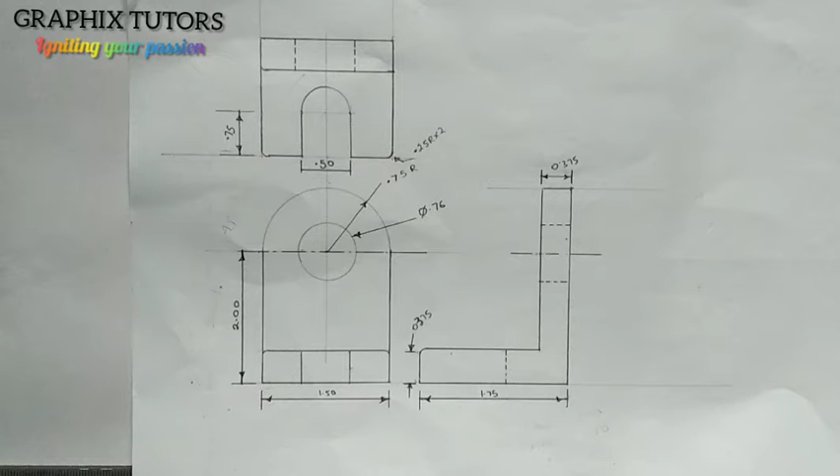Today we want to study another aspect of engineering drawing where we are going to be assembling a component which is already exploded in form of an orthographic projection, and this is the component here. It's already an orthographic projection, so we want to draw them in isometric. Now, if you look at this very well, let me zoom to you.

Everything is in centimeter, right? So you have to convert them into millimeter. We know that if you are moving from meter to millimeter, you'll be multiplying your value by 1000, right? And if you are moving from centimeter to millimeter, multiply your value by what? By 100. So what we simply do here is multiply everything here by 100. Let's start and see how it goes.

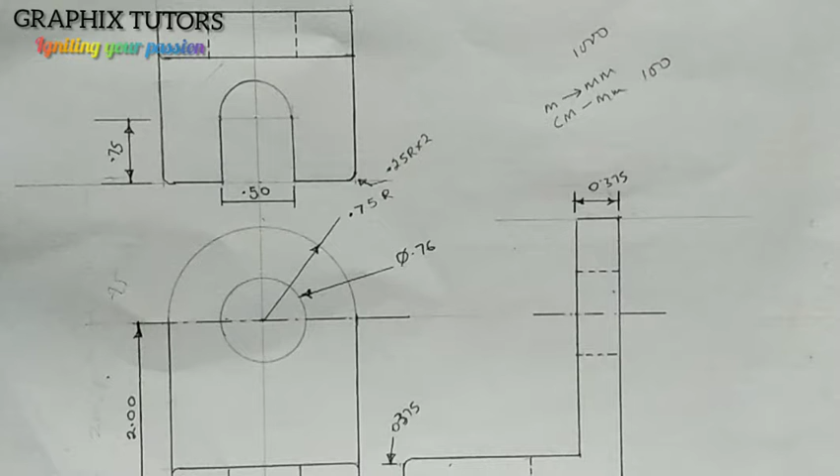0.375 times 100 will give us 37.5. So the main dimension here is 37.5 millimeter. Is that taken? Now the same thing here, from here to here is 1.75 multiplied by 100, we're having 175. The same thing here, multiplied by 100, we'll be having 150. Right here, multiplied by 100, we'll be having 200.

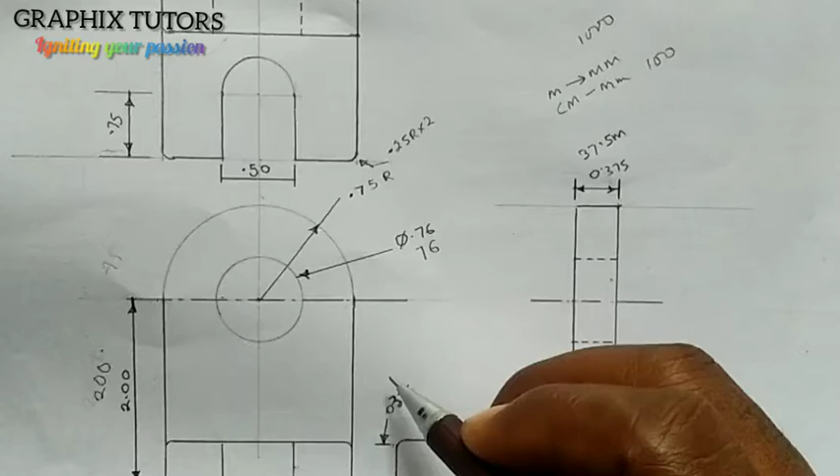Here, multiplied by 100, you'll be having 76. Here, 0.75 multiplied by 100, you'll be having 75. Then if you multiply here also, you'll be having 75. Right now, what else again? This also gives me 37.5. This will give me 25.

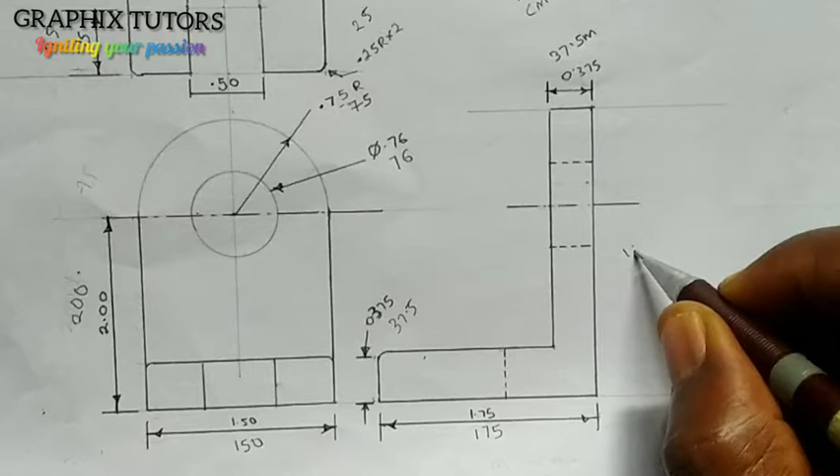If you notice this now, these are very big. So I'm going to be using a scale of 1:2, half of my dimensions. So if I divide 175 by 2, I'll be having 87.5. So 87.5 is what I'm going to use. I'm doing my scale with 1:2. So the next one, 150 will give me 75. 200 will give me 100. 76 will give me 38. The one I circled is what I'll be using.

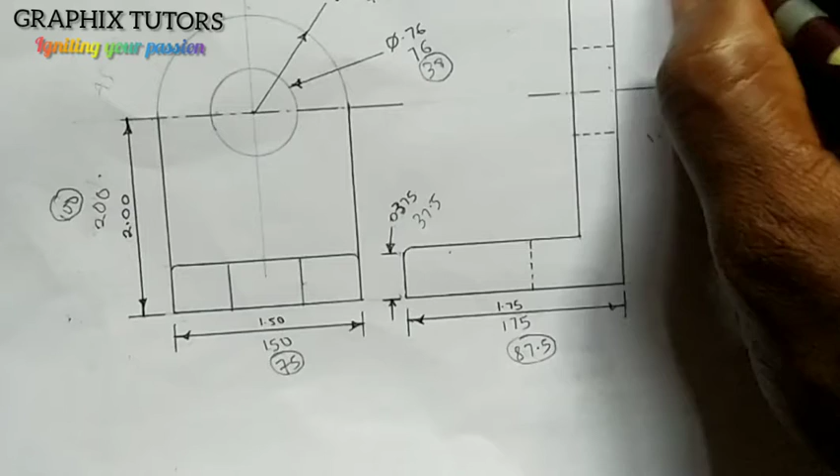Then 37.5 will give me 18.75. That's what I'm going to use. Then 75 will give me 37.5. 25 will give me 12.5. Then 75 will also give me 37.5. Let's do this one here, 37.5.

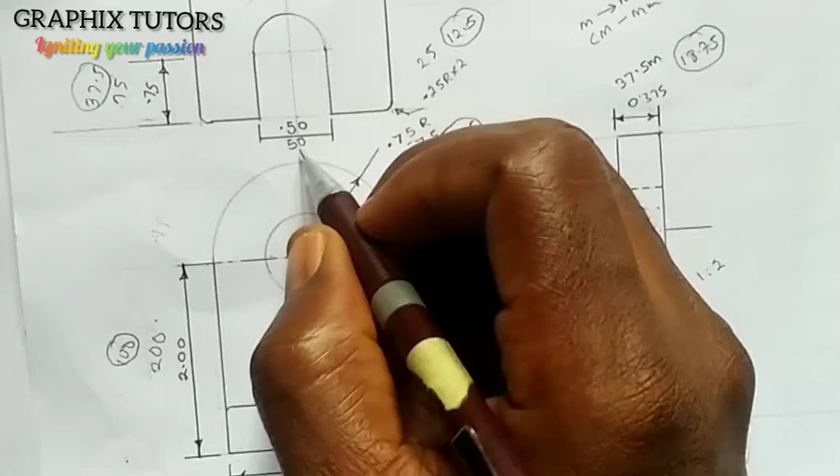Then 0.50 times 100 will give me 50. If I divide it by 2, I'm taking half of the dimension to give me 25. Is that taken? So those ones I circled are what I am going to use. If I divide this, I'm still going to have 18.75. So these are what I am going to be using. So let's start and see how it goes.

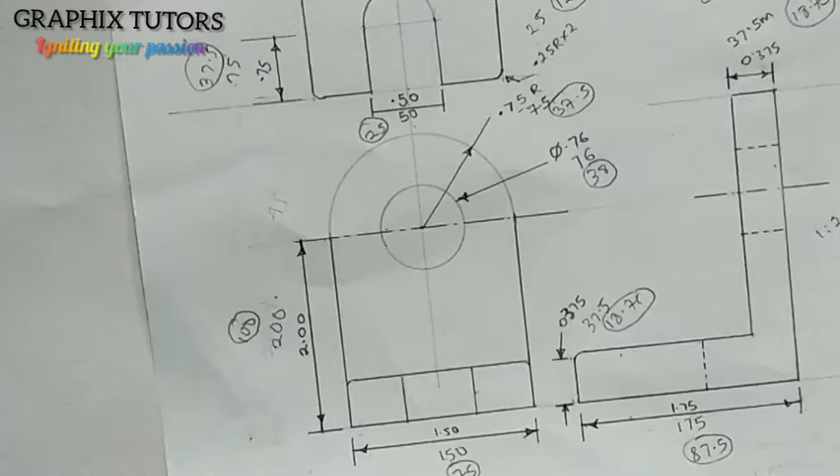First of all, since we are drawing in isometric, we need to draw our 3 axes. So first of all, I'm going to draw the vertical. You can see that. And I'm going to draw the horizontal, which is this. Then also here, an angle of 30 degrees to the horizontal.

Now in doing this, I'm having my length, the width, and the height. Looking at my diagram here, this is in third angle projection because my plan is on top of my front elevation. This is the end elevation here, right? So I'll first of all start by drawing this. How would I start? I'll look for the entire height, the entire length, and the entire width.

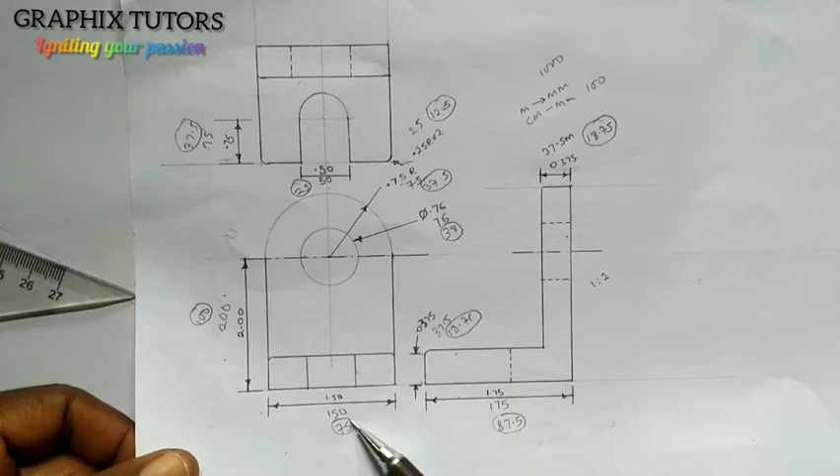This is the width here. I'm using the one I circled, that is 75. So I'm going to measure 75. 75 will be from here to here. Can you see that? So this is 75, starting from here to this point. Right? Now the next thing I'll do is the other aspect again.

The length is 87.5. So I'm going to measure my 87.5. So this is 87.5. Let's see how it goes. So this is 87.5, somewhere around there. So we're going back.

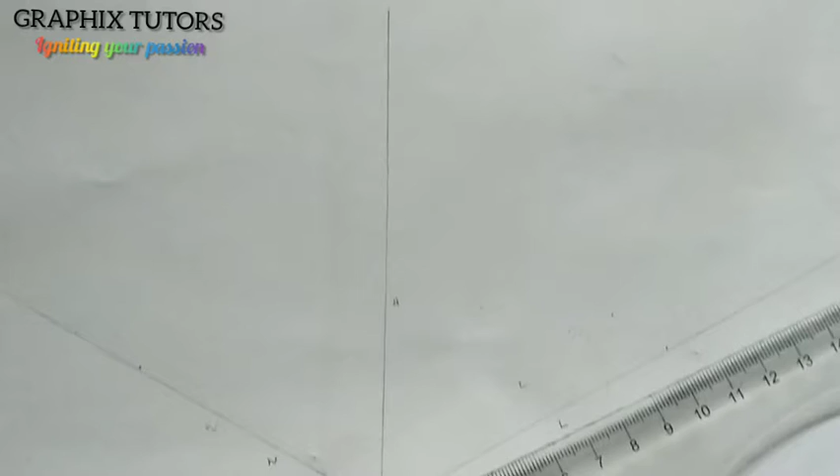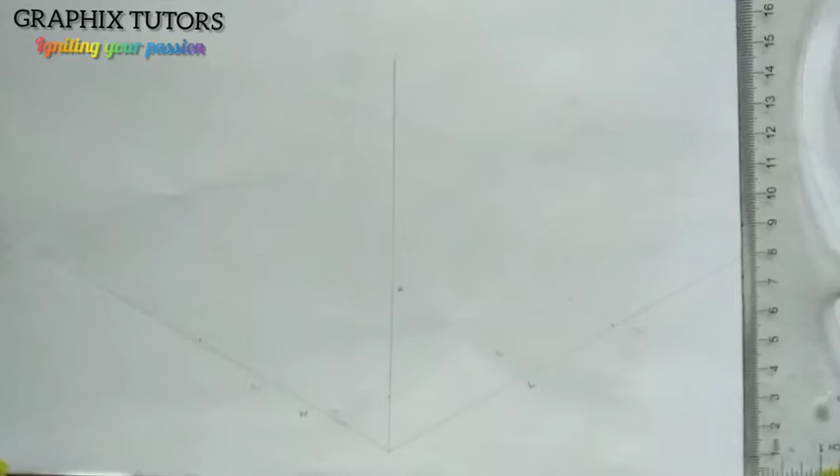Now after that, the height here is given to be, first of all, let's move with 18.75 first. Right, let's start with that. This thickness here, 18.75, which is this. So I'll start with that. So I'll go with 18.75. So from 1, this is 10, 15, this is 18.75 here, somewhere around here. So I'm going to close it up. Just start with that first.

I'll close it up, placing it on my T-square. Take this up, first start. Then come here, take this up also, first start. Then I'm going to close this up. And I'm going to close this up too. Right? And I'm going to close here up too. And close it up too.

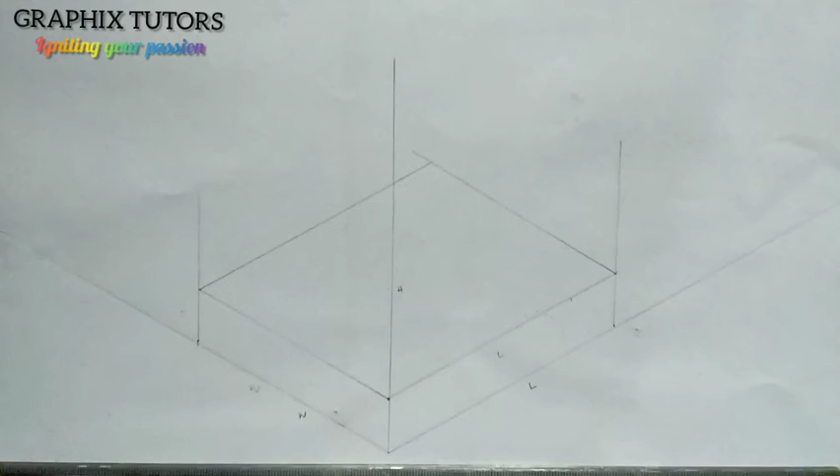Now, after doing this, I want to draw. I've gotten this plane here, as in this thickness here. So I want to start drawing. Now what do you discover? You discover that this is the front and this is the side. So I can easily just stick in here since I know where exactly I'm going to. I'll take my metal rule and I'll take in from here to this point here. From here to this point. Can you see that? That's the first thing I'll do.

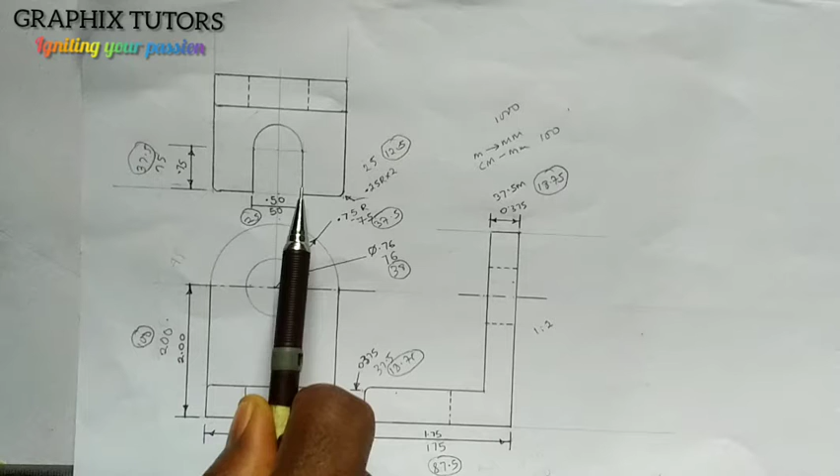And the next thing I'm going to do is, if you look at this, this is the plan, right? So it's telling me that from the center of this, from here to here, we have what? 50, right? So I'm using 25. This is 50, it's too big. So from this point to this point here is 25. That means from here to here also is 25. So I'll get the center, because this is the front. I'll get the center of this line here, and I'll measure 25 in between.

So there are two ways we can do that. If you know from here to here, we know it's 75. So to get half of it, we'll use 37.5. So I'll take my meter rule and I'll measure 37.5. Right? So what you can simply do here, instead of that, you can easily measure your 75 here. This is from 1 straight down to this is 75. That's my AB, right? We know it is 75.

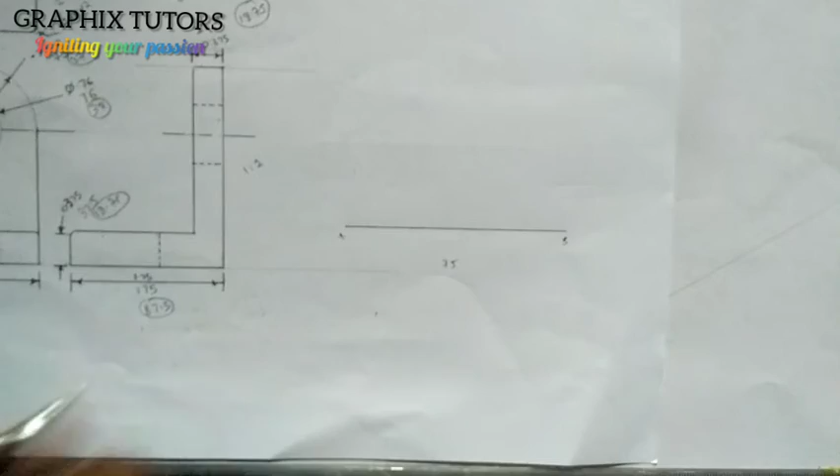So if I bisect it this way, from here to here, I will bisect up, and I'll bisect down. I'll place it here also. I'll bisect up, and I'll also bisect down. So they'll be passing through the center point from here to here. Right? So from here is 37.5. From here is 37.5. So instead of using my meter rule, I can easily take my compass here and place it from here to here to get my 37.5. So I'll place it here and I'll cut. So that's my 37.5.

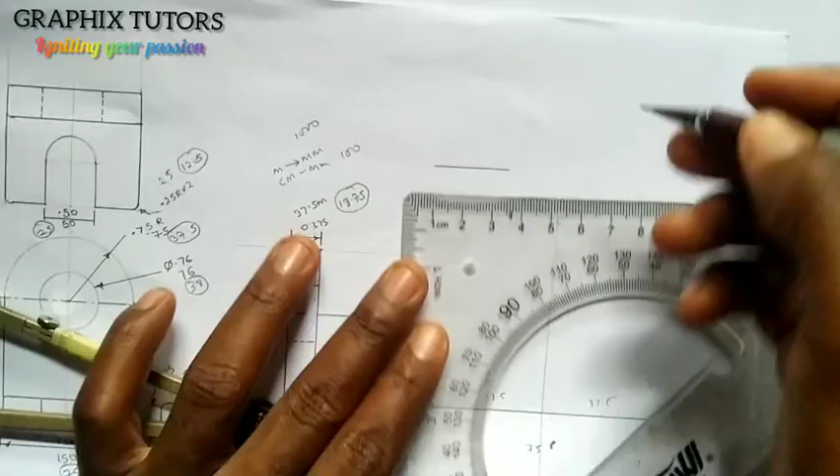Now the next thing I'll do is 25. We say from here to here is 25, right? So I'm going to use 12.5. So let me measure 12.5 on my meter rule. Again, to save ourselves from stress, you do the same thing, you measure 25. 25 is from 1 here straight down to this, right? Then I'm going to bisect it. I'll cut here, then place it here, right? So where they are placed, from this point to this point, this is my 12.5.

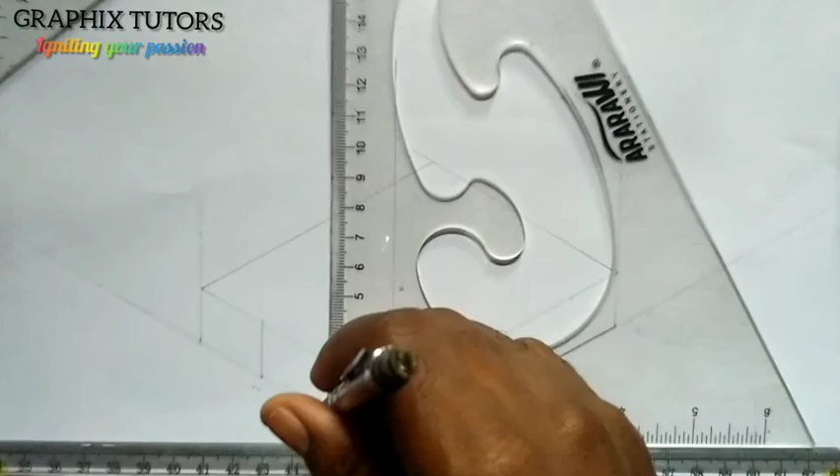So I'll take my meter rule, place it here to this point, and I'll measure 12.5 to the left and 12.5 to the right. You can see that, and I should be able to take them up to this point. Then take them up to this point. Can you see that? Now if you look at this here, this is 12.5, right? Now it moved from somewhere to some extent here. That means I need to move it inside.

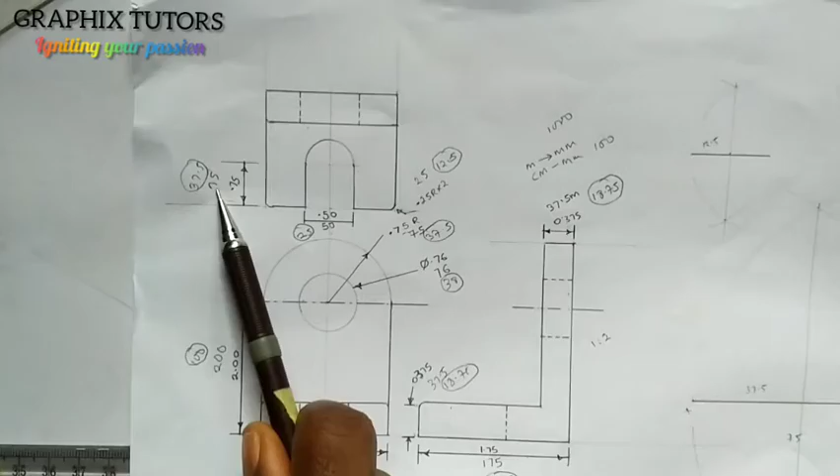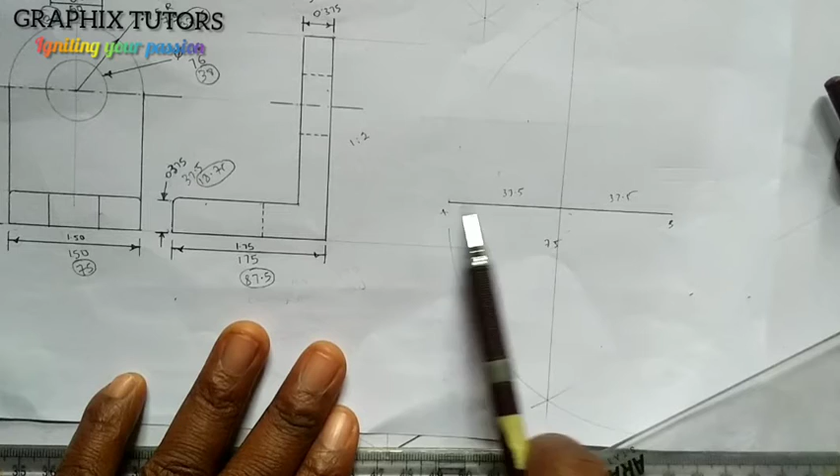But the question is, what is the distance? The distance is telling me that from here inward, I'm having 25, right? And from here to here 25. So it means that from here to a certain distance is 75. So what am I going to be using here? I'm using 37.5, because I said earlier that's the one I circled. So if this is 37.5, if I bisect it again, this point to this point, that's 37.5. So what I will do is I'm going to take this in.

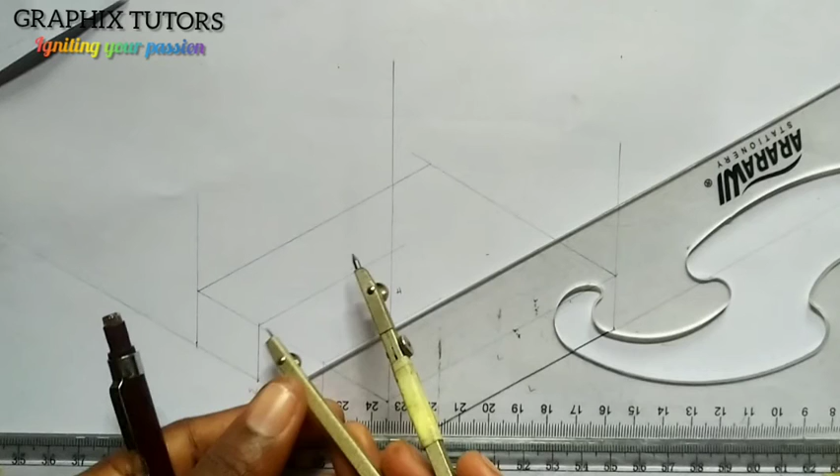I will take this in and also take this in, right? And I'll measure my 37.5 there, which is what I measured from here to here, and I'll place it here. I'm going to mark. So where they meet, I'm going to take my set square and just use my faint line to join them at that point. Join them at that point.

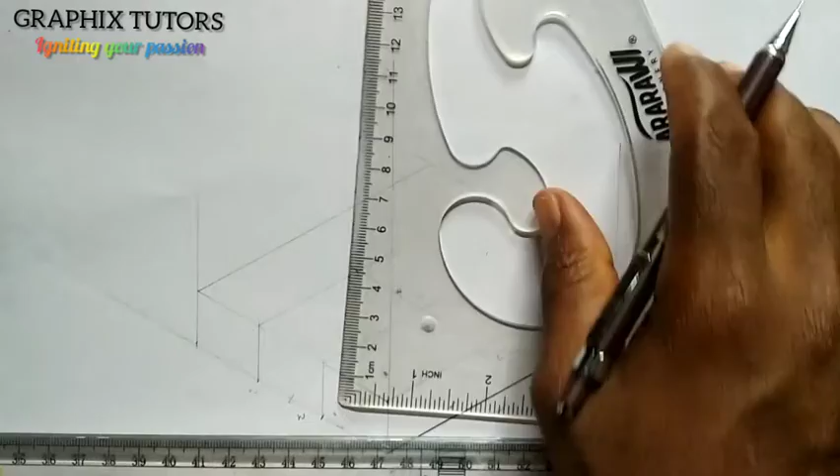You can see that. Now also I can just take this up also, this my center point here. I'll just raise it up and put it up. So they are all meeting at this point, right? Now I know very well that this is also going in because the thickness is going in, so I'll just stop there first. So it is somewhere around here. It is somewhere around here.

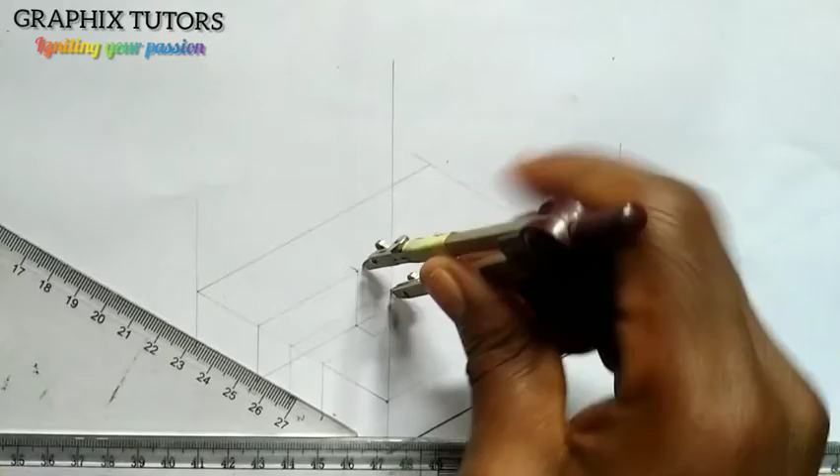You see that I'm using faint line? It's somewhere around here. So I want to draw, there's a curve. If you look at the plan, there's actually a curve here. So I'm going to draw my isometric circle there. So if you look at it, we know that the distance from here to here is 37.5. So what I'm going to simply do is I'll just take my compass. I'll place it at the center point here and I'll take this measurement here. I see the measurement from here to here, and I'm going to just come and cut it here, cut it up here, and cut it down here.

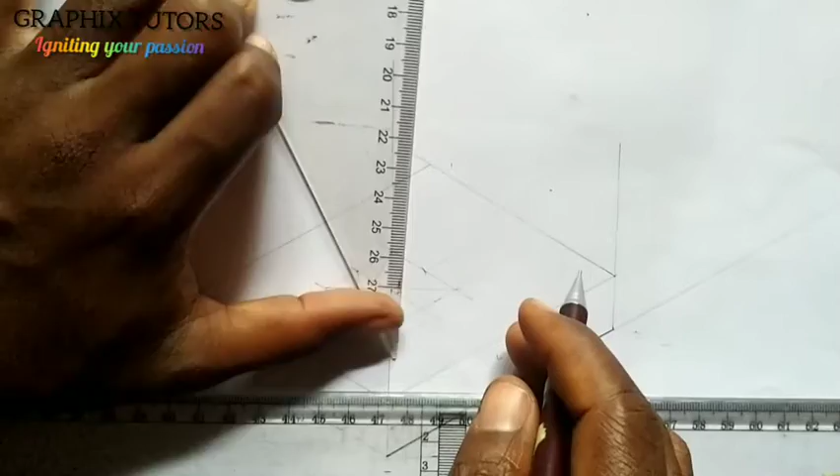Is that taken? So I'll complete it to give me a box, like a box. So this will give me a box from this point and this point also. Now I've gotten this box here you see. Is that taken? So what I'll simply do is complete it to draw my isometric circle. Right, and then I know that from here to this part, and from here to this part. You can see that. So let me zoom it.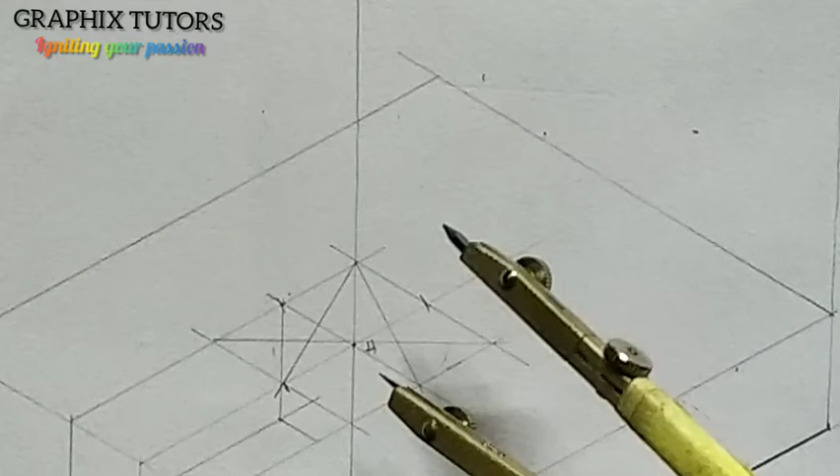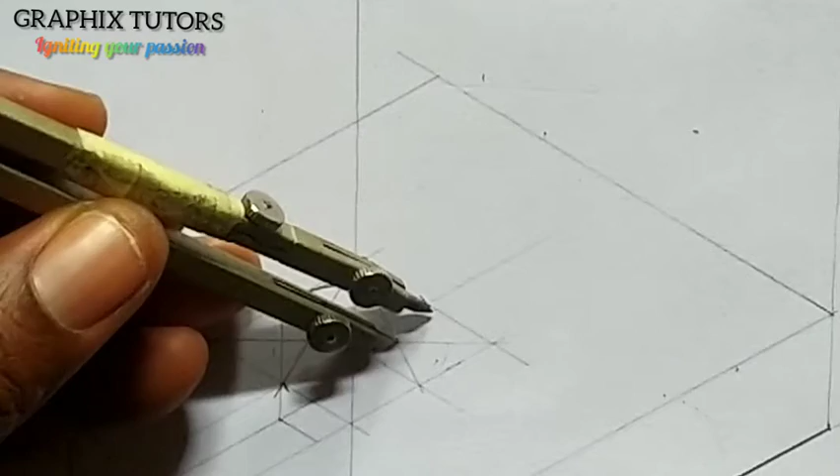Now, after doing my isometric this, from this point here, I'll place it and I'm going to draw an arc, right? There's an arc. You can see that. And now I'm going to come at this point here, place it here, and I'll come to this point, and I'll zoom it out. Right? Sorry. I'm going to do the same thing. When doing that, take it back.

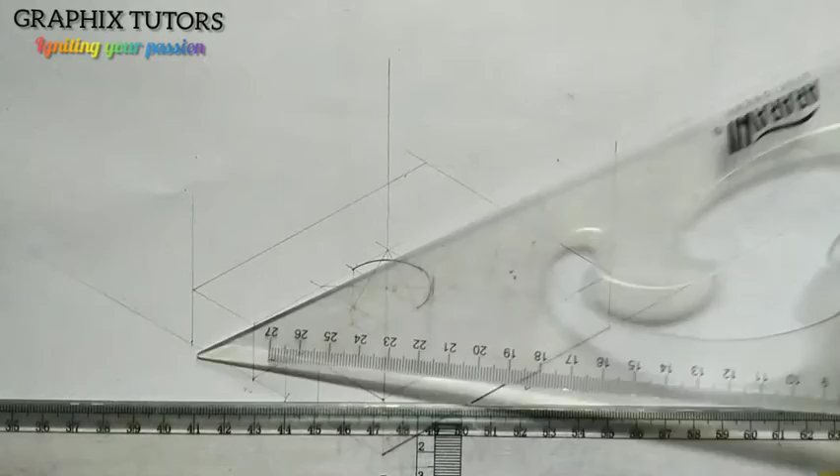Now, what we're going to do here is that I'm going to pull it straight down. Right, this curve I draw here is this curve. So I'll pull it straight down to touch the end in here. So let's do that. From here. Here also. Right. Now, also at this point too.

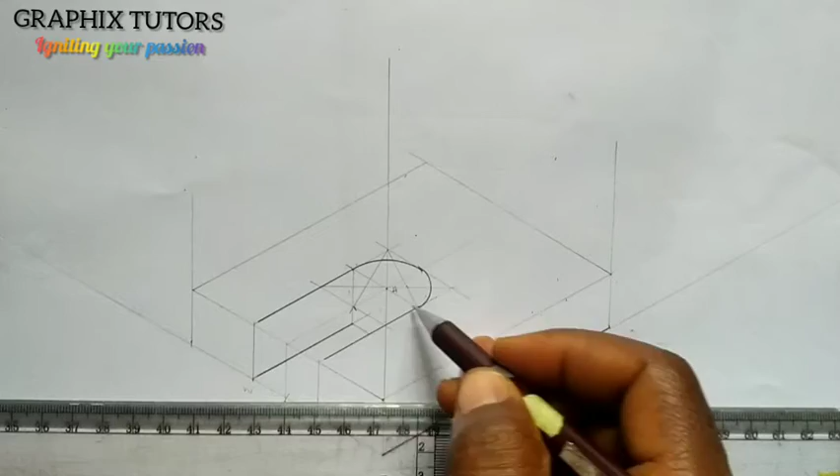Now, what I'll help myself is just using to draw this guy too. So what I'll do here is I can bring this down. And bring this one down too. Bring this down too. I'm repeating the same thing here. Faint line.

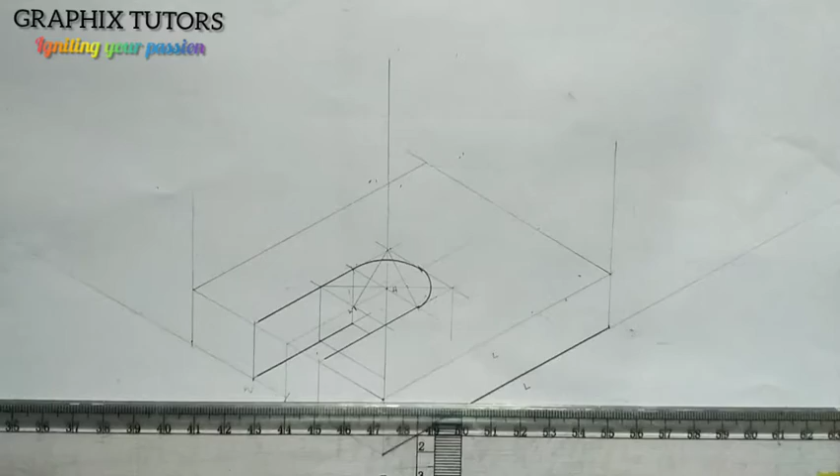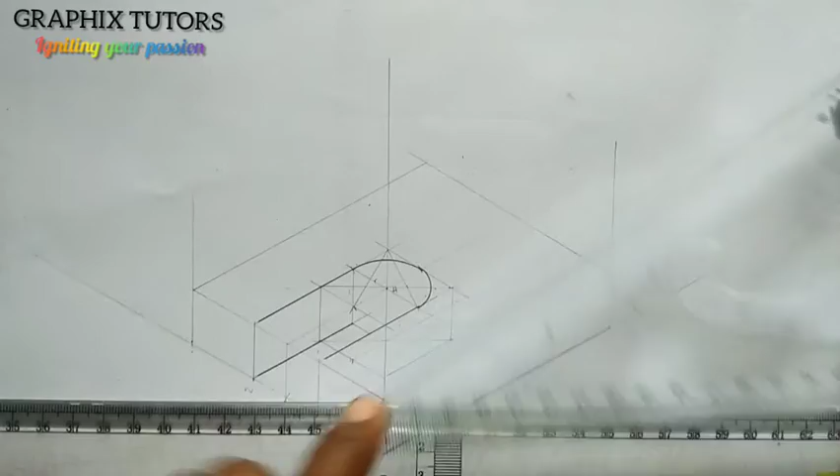Right. So we know we are joining from here to this point, right? And to save ourselves from stress, I have this way. The center of that guy. And here too. What I'm actually doing is trying to replicate what I did up here. So if you look at what I did here, at this point here, I'll place, let's zoom it up and see.

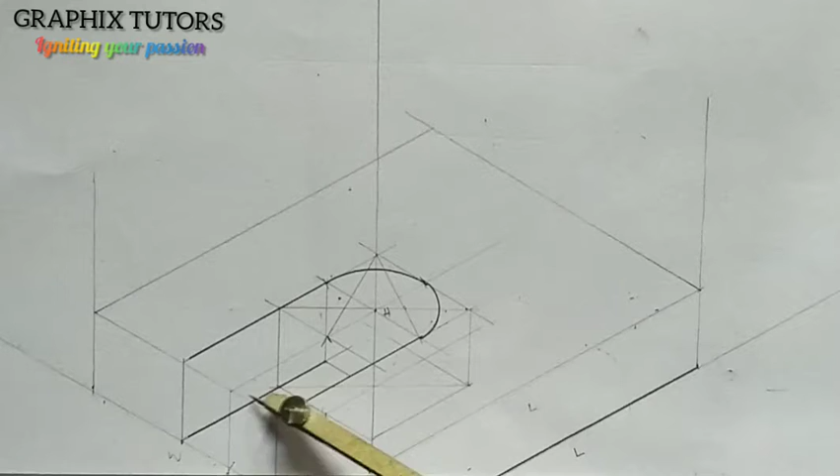At this point here, where this line and this line meets, I'll place my compass here, and I'll take this curve here. I trace it down here. So I'll place my compass at this point, and I'll draw until it touches here, just like this. You see that? That's what I want to just do. Take it back. Now if you look at this, I will complete this drawing here.

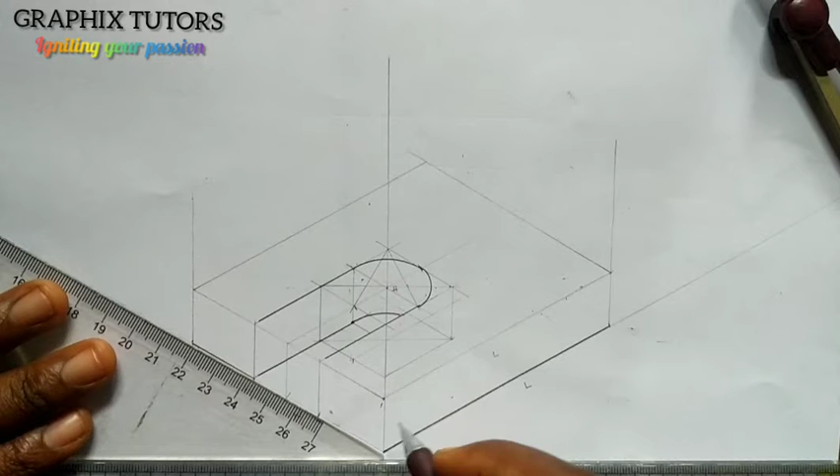From this point to this point, then from here also, from here to here, right? Then from here to here, from here to here too, and then so this is what we're going to do.

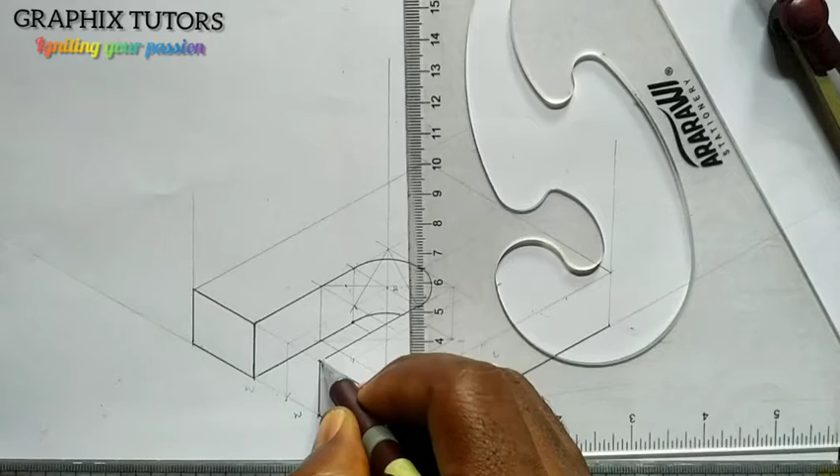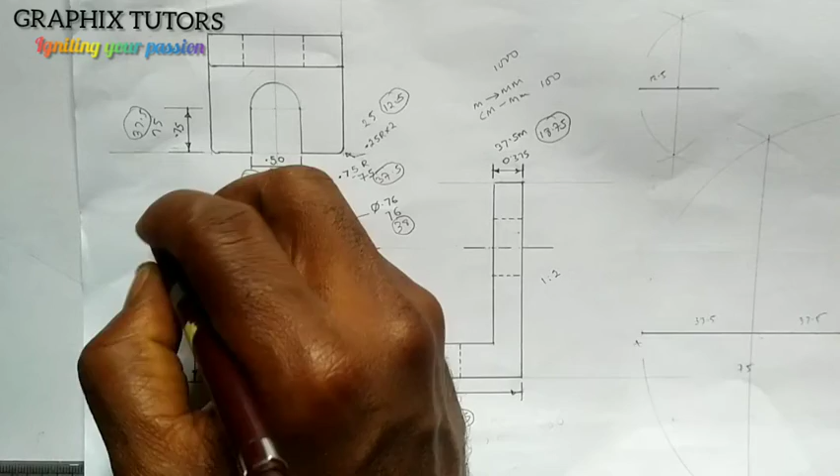Now we've done this, right? So the next thing we'll do is, if you look, we successfully interpreted this guy here, which is this. So the next thing we need to do is to draw this upward. So I'm going to measure from here to this point is 200, which is from here to here, or 100, and from here to here is 75. From here to here is 200, and from here to here is what? 75. So what I'll be using will be what? 37.5. Right? Because if you look at the radius, 0.75, which is 75, and half of that is 37.5, that's what we have here. So I'm going to measure 137.5 up here.

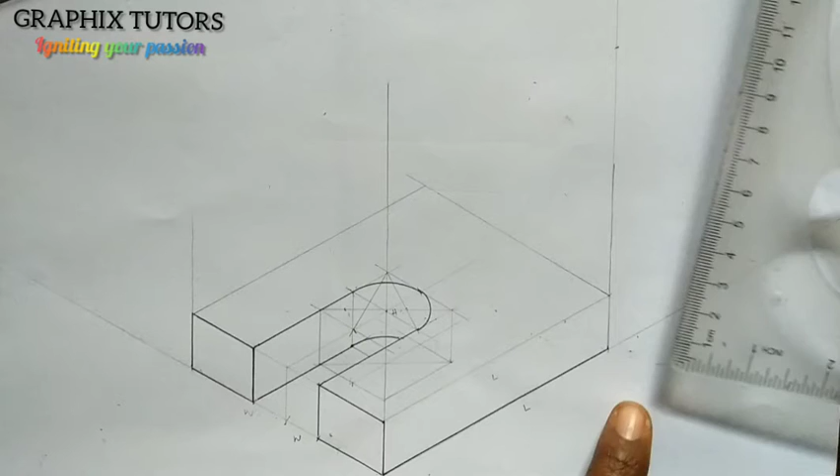So first of all, I'll measure my 100 up. So with the help of this, I'm going to measure my 100 up. So let's take it down a little bit. With the help of my set square, I'll take this up. I'll just take this up this way, and I'll measure 100 from 1 to 11 is 100, right? So I'm going to do the same thing for the next one too. I'll take this up too.

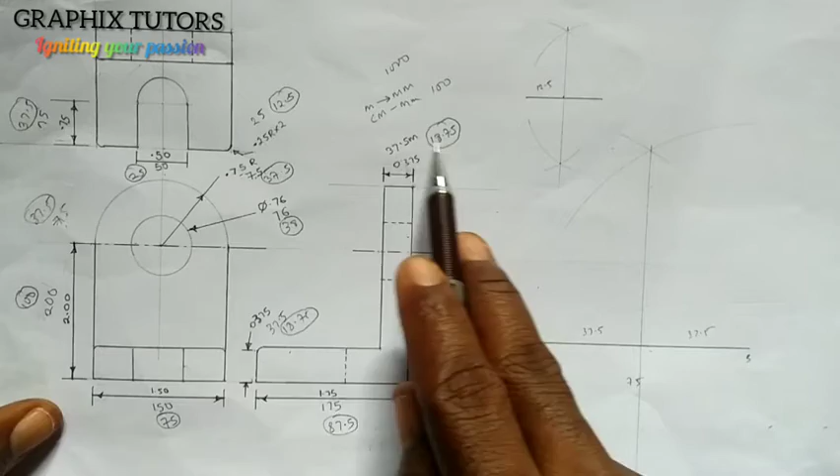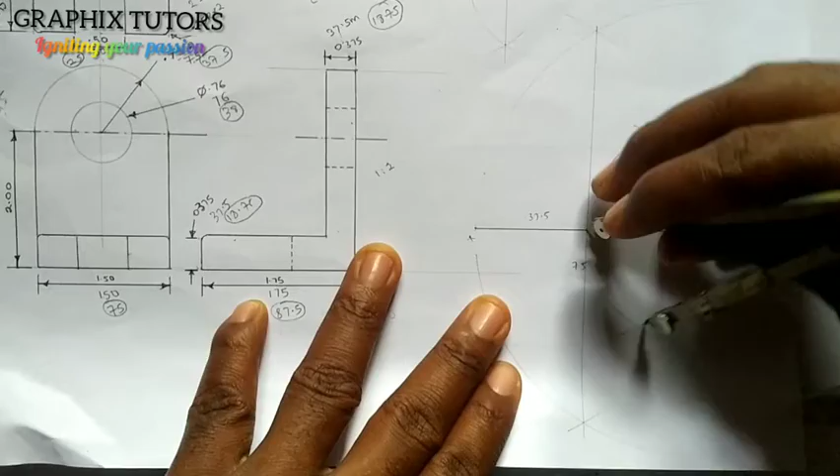I'm going to close it up. I'll close it up, and I'll measure the thickness too. Look at it. The thickness is 18.75 after doing all the conversion. So I'll have 18.75. So let's measure 18.75 here. So how would I do that 18.75? Is by dividing 37.5 by 2. So I can just come here and bisect this 37.5 here, this to this. So once I bisect it, up, down, up, down, I can just join it together to the meeting here. So that will be my 18.75.

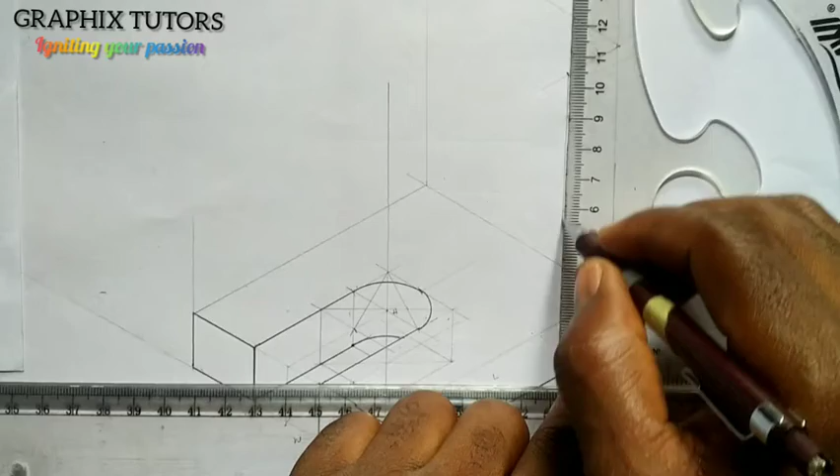So if I place it from here to here, I'll be able to get this. Right? So I can easily bring it down, straight down. And I'll close it up. Close it up. Now I've closed the box up, right? So what I'm going to do is I'll take in from here to this point. You can see that? Because from here is thickened.

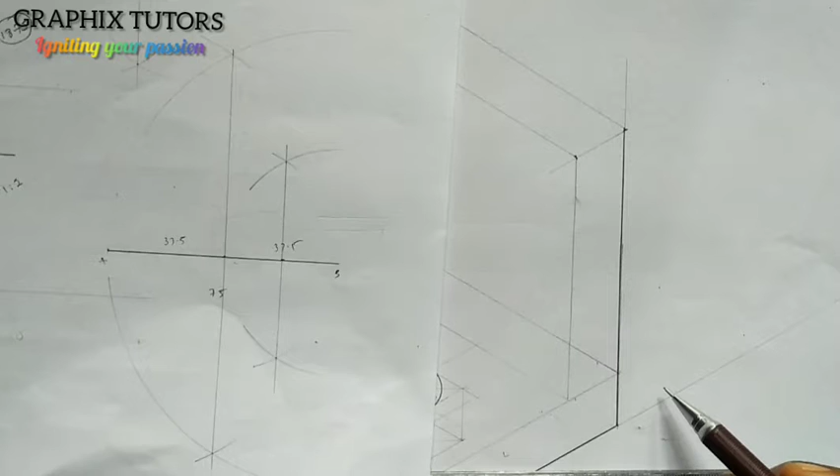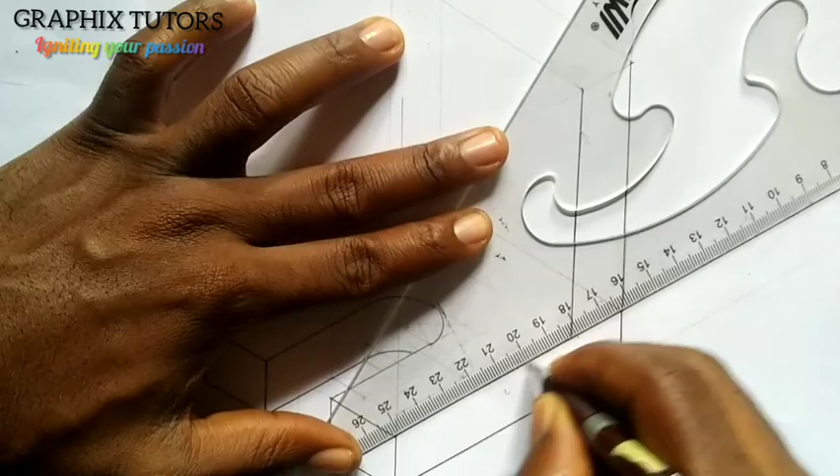All good? Now the next thing I'm going to do is I'm going to also thicken from this point to this point here. And I'll close it up. Just close them up. I'll close it up too. I'm going to close it up too.

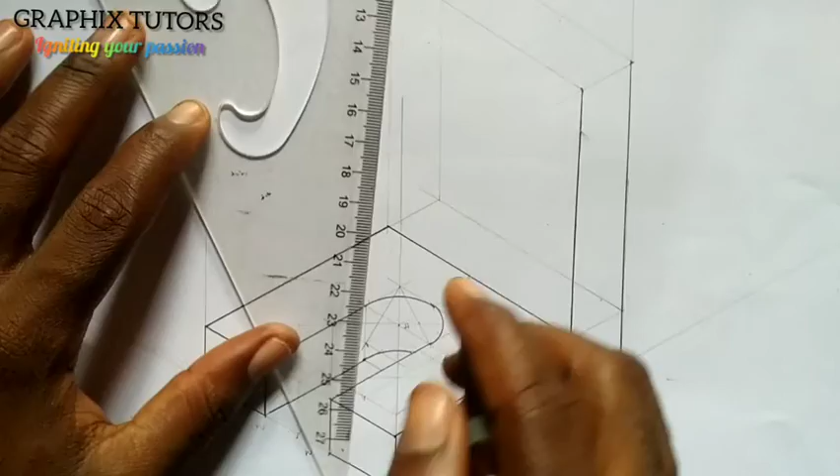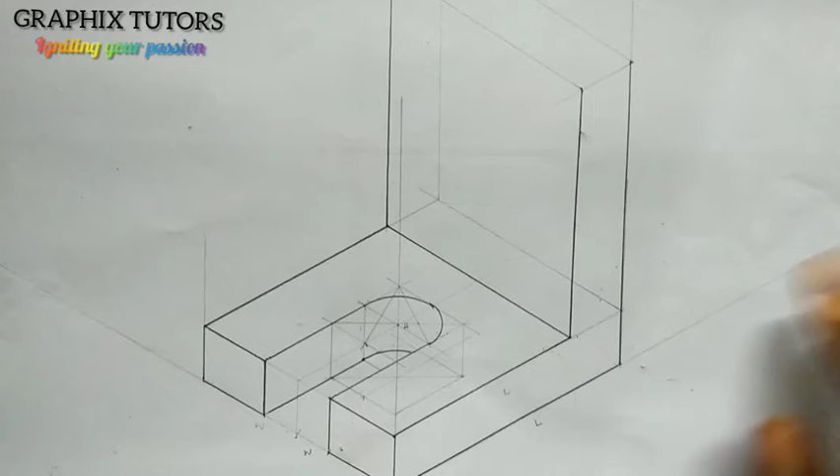Now, the next thing that is remaining here, what I just did here now is to draw my 100 from here to here. Are we good? So the remaining one here is the curve. So I'm going to measure another extra 37.5 upward. So this is what I'm going to do. So we know from here to here is our 100, right? And to look at it, from here to here is also the 100 that we have, right? Now that means that's our center point. So it's from here we're going to measure 37.5 upward.

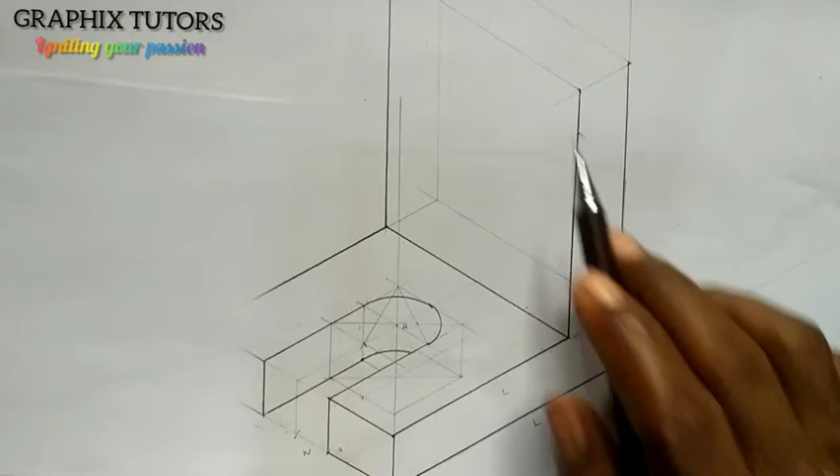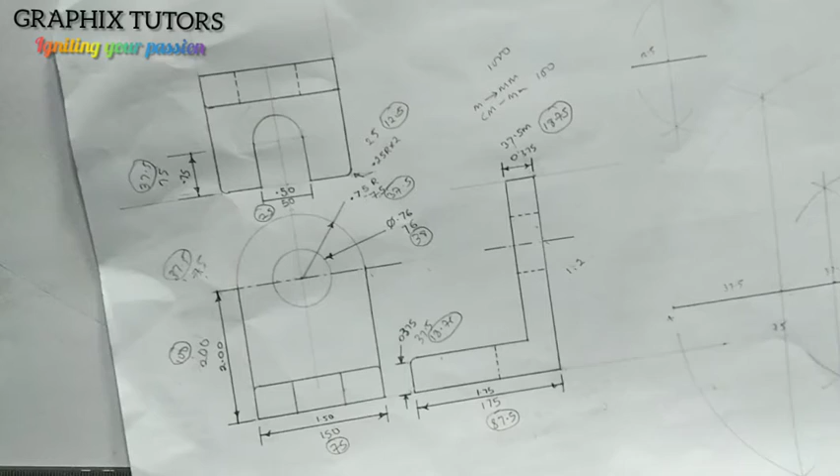So the first thing we'll do here is, this is our center line here to this point. So I'll just take the center line up. Just take it up. So this is our center line here, right? So from there, what we're going to do is we'll take it up fully. Or better still, you can use this and take your 37.5. And you measure that 37.5 from here to here, right? And you place it here and you strike up.

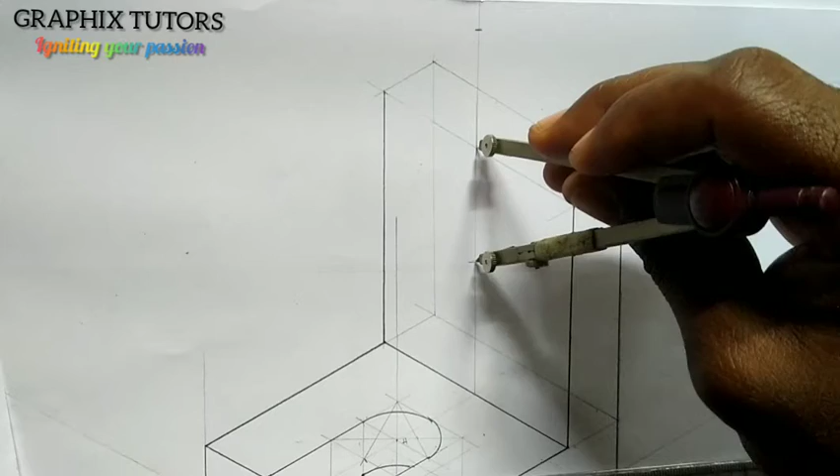Then you also strike down. Can you see? You strike up. Let's see the up that you're striking. Let's take it down. So you strike up. Can you see that? Place it here. Strike up and you what? Strike down, with the same measurement. You know this is already there. This up, this down, and so on and so forth. So after you strike up and down, let's place it at the center. Strike up and strike down. So we're going to be having this.

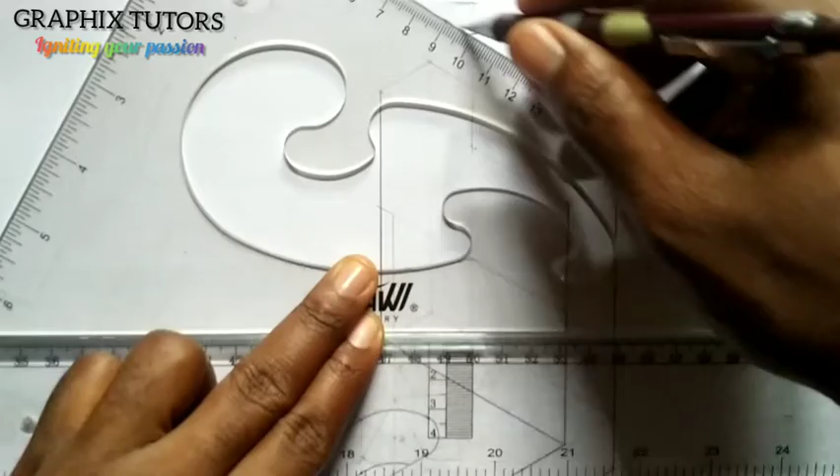So I'll take my compass, my set square, and I'll place it here to complete this, and I'll take it here to complete this. So I'll take this to be here, and this one also to be here. Do it again, and this is the center here, so don't get confused. After completing it, I'm going to join this point to this point.

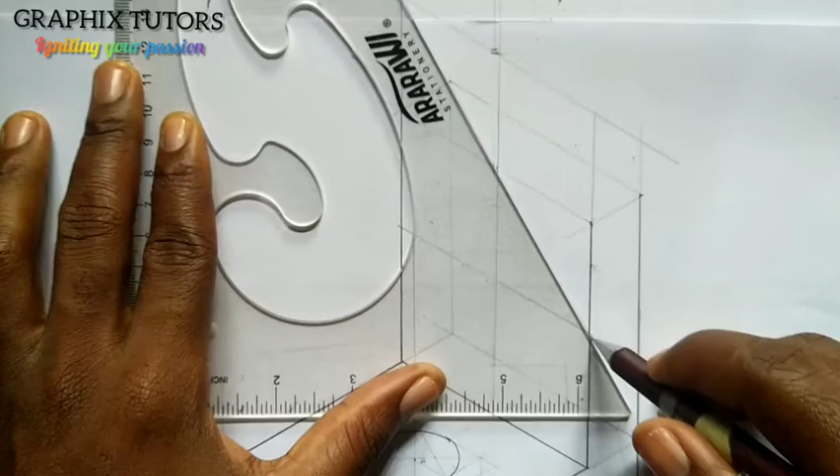Concentrate on the center. You can see that. Let's take it down. That point to this point, point to the center. Then from this point, I'll move it to touch the X. Touch here, just like the way I'm constructing onto a circle. So from here also, I'll take it up to this point too.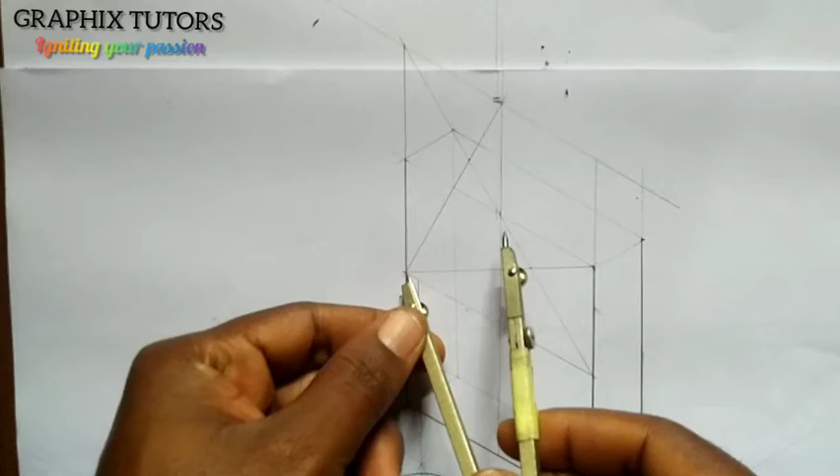You see that? So I'm having this point and this point as my center point. So what I'll simply do here is to take my compass, place it here, and I'll take it to this point and I'll draw my curve. And I'll place it here also, take it to this point and draw my curve.

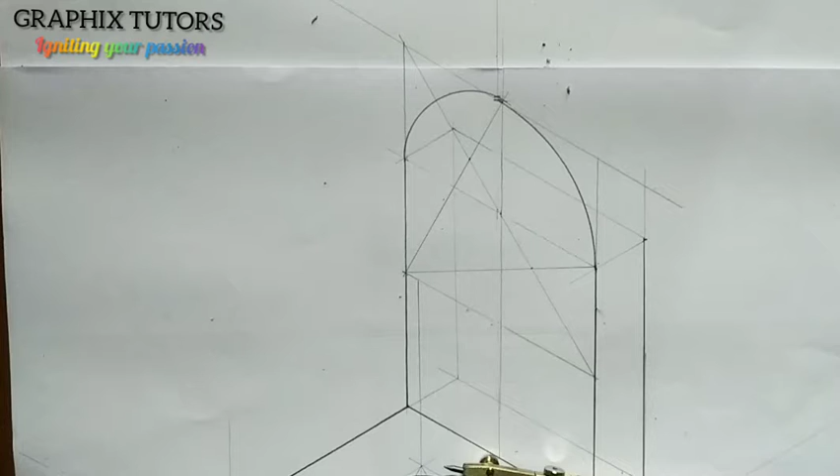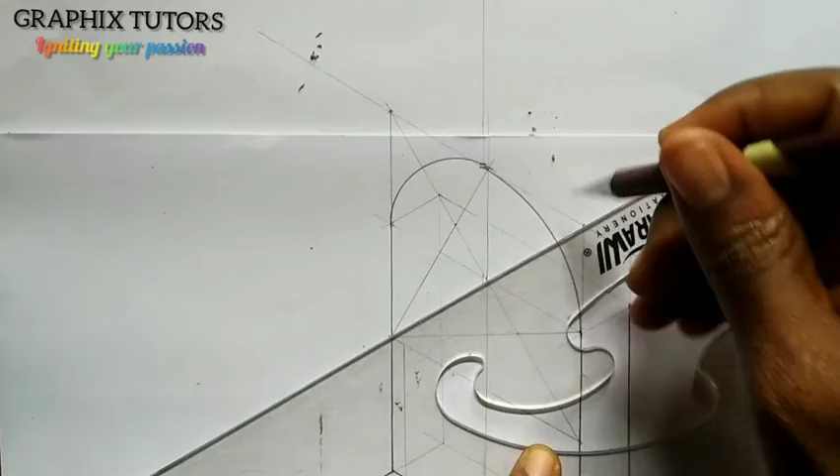Right. So the next thing is to repeat the same feat at this junction here. Repeat the same thing. Just complete that box there. Here's the point where they meet. Now I'll just take this, and I'm going to draw this window. I'll take this in. So in doing that, I'll close it up.

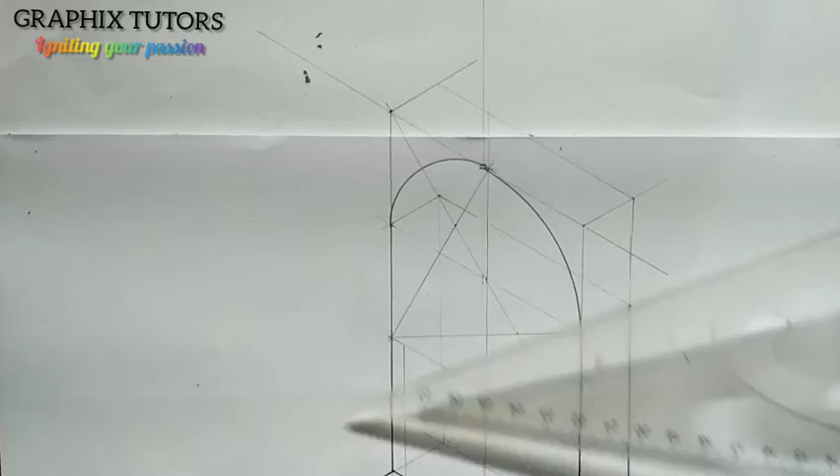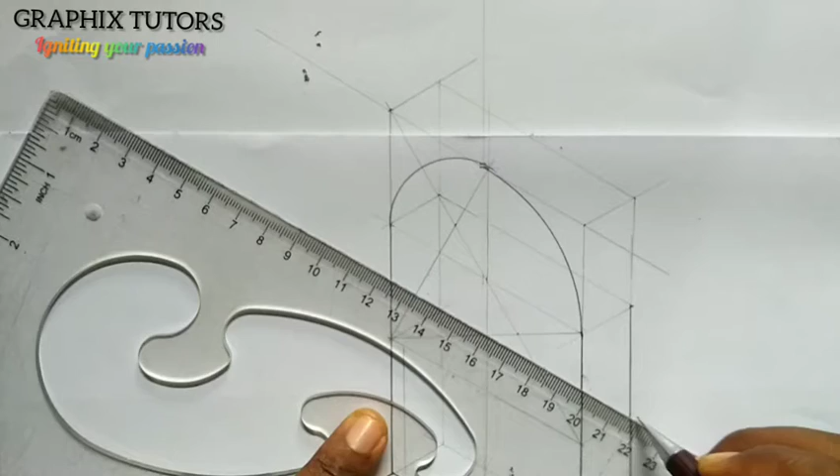So in doing that, I'm having this, and this, and this. Bring it down. So if you're looking at it, I created a kind of a box. What I did initially, I want to do it again. So this point to this point is this point to this point. So I'll join it together with a faint line.

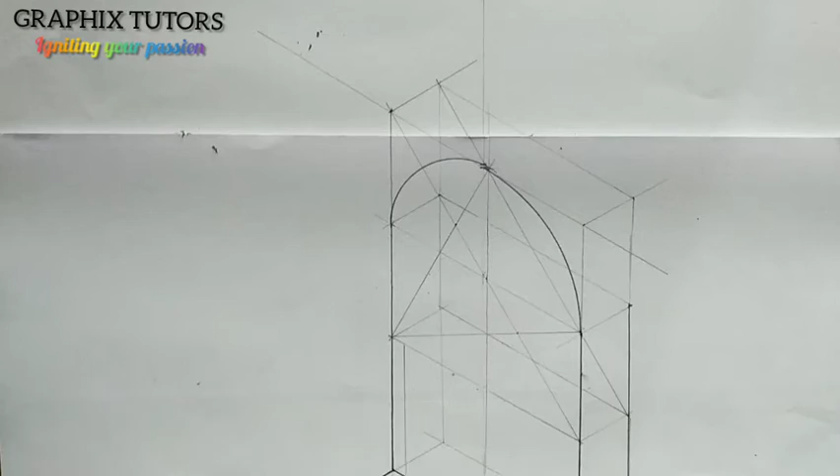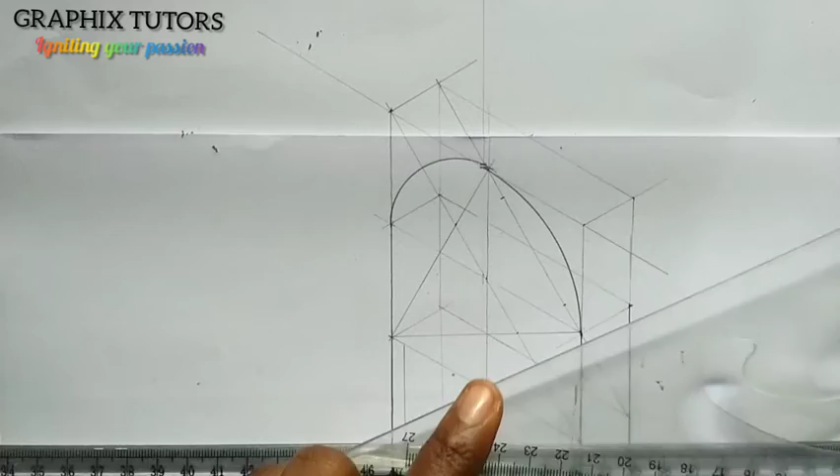Right? So I want to transfer my point. In transferring my point, I can use my set square, placed this way, and the first point here that I used to draw this curve, I'll transfer it to this point, and the second point here, I'll transfer it here also. So what I'll simply do here is give myself a kind of boundary, and also boundary. So let's do that and see.

So if I place it here at this point, I can easily get my curve, but I won't complete it. And I'm going to just join here to here. Then the next one will be this. I'll place it here. I'll come to this point where I will draw this to touch here. So let's do that and see. I have that, right? So we're moving.

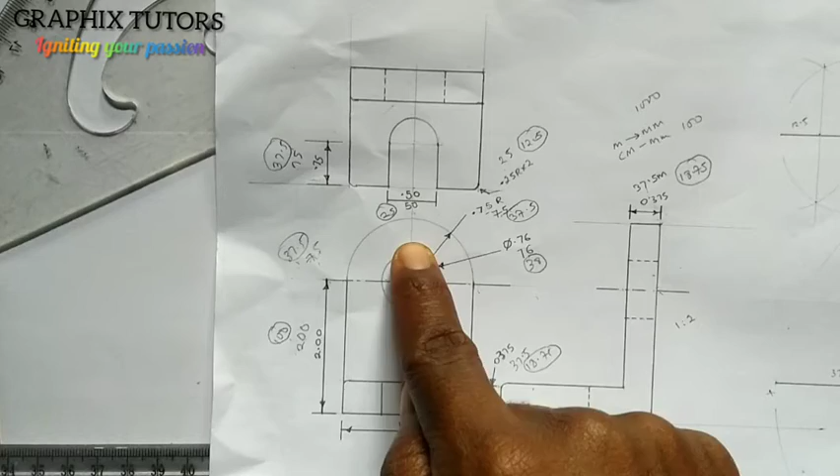So the next thing we'll do here is, we've gotten this point. Now what's remaining is this, and the diameter is what? 38. So I'm going to measure 38 on my meter rule. From here, I have this 38, and I'll place it at this point, the center here. Right, I've already done that. So I'll take 38.

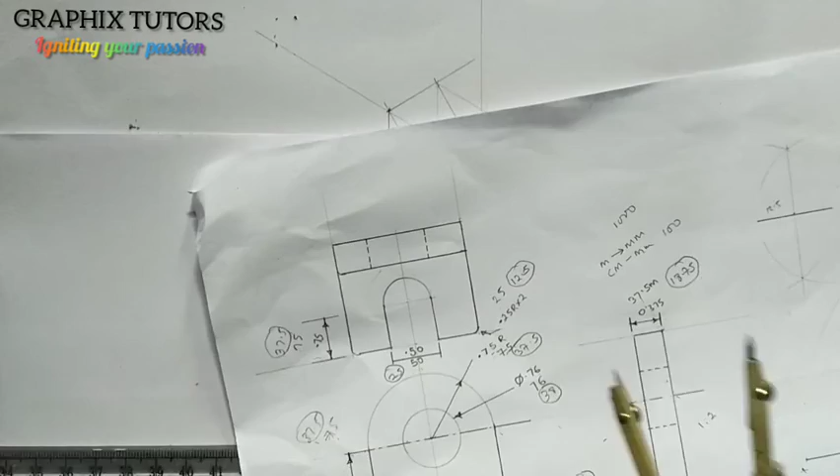So since I said diameter, I'll take half of 38, which will be 19. Since the diameter here is 38, I'm going to measure 19. And I'll place it here, and I'll mark up, mark down, left, and right. So I'll close them up with my set square. Looks like what I've been doing since the beginning.

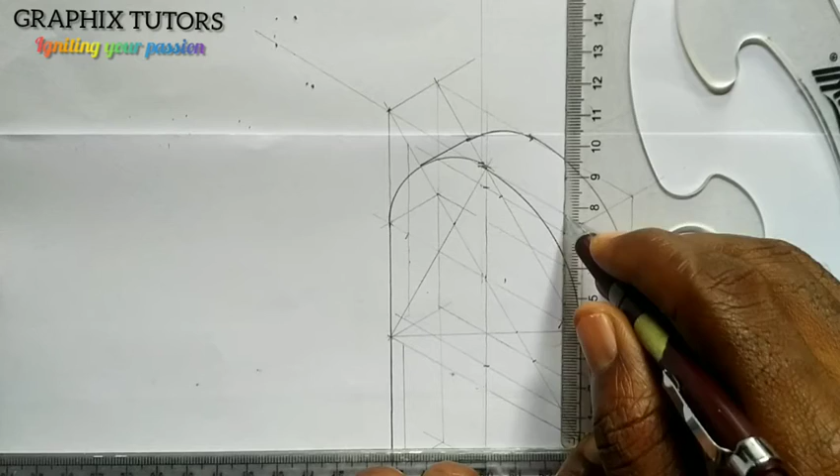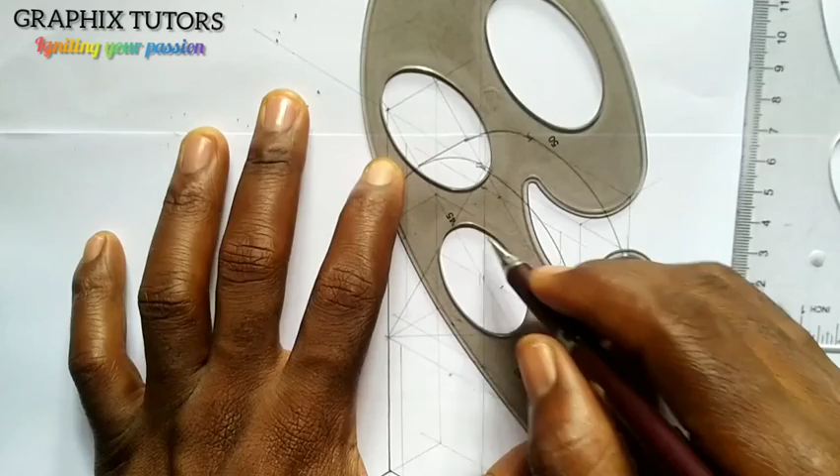So what you guys do here, instead of stressing yourself, is you can use your ellipse template at this point. Since it's 38, you look for an ellipse that is closer to that, 38 or 40, and place it at this point. Gauge it to ensure that this line is at the center. Gauge it there very well, and bring that out.

For the thickness, there's another circle inside. So you know this is one diagonal, this is the second diagonal. I need to get the center of that diagonal, or I'll just move the center to this point. This is the center here, right? So I will take my ellipse template, same value, and gauge it on that point. You can see the line being at the center of it. So I'll just do this. So this is what we'll be having.